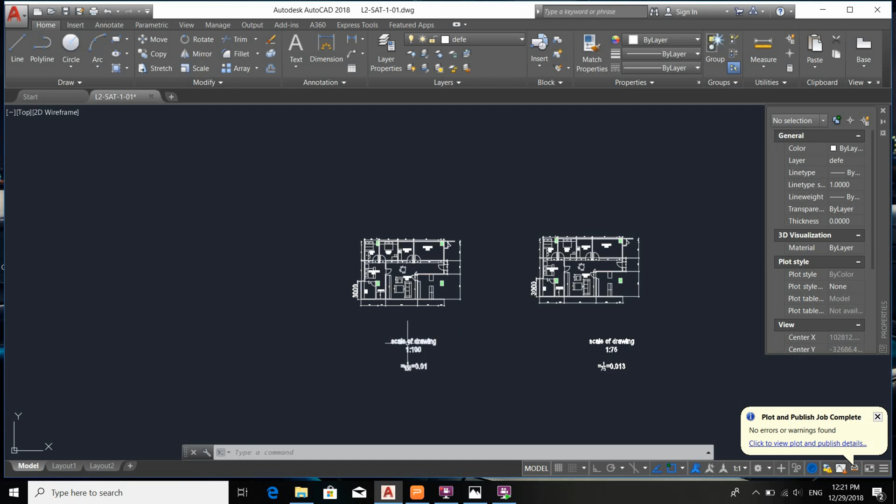Hi everyone, today we are going to learn how to print out drawings in the scale of 1 to 100, 1 to 75 and others.

To start off, we have to understand that this piece of construction drawings here is drawn up to scale, meaning that the sofa, the coffee tables, they are all drawn up to the dimensions in real life. So, now we want to print this construction drawings on an A4 size paper with a specific printer at the scale of 1 to 100.

To draw an A4 size paper, we know that an A4 size paper is 297 millimeters length and 210 millimeters width. 297 by 210. So now we have our A4 size paper constructed here in the scale of 1 to 1. This is an actual scale.

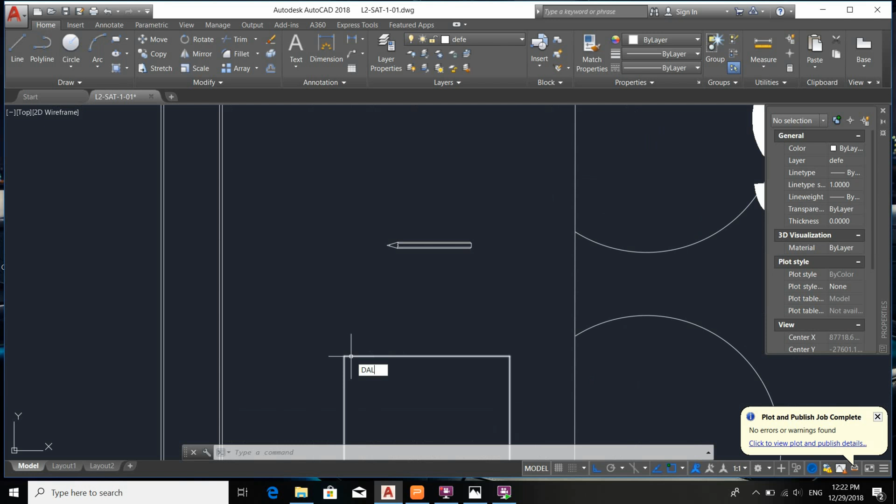You see, if you measure this, it is going to be 297 in actual scale. If you compare it with the pencil also, you can find that it is actually appropriate to say that this A4 size paper is in the scale of 1 to 1.

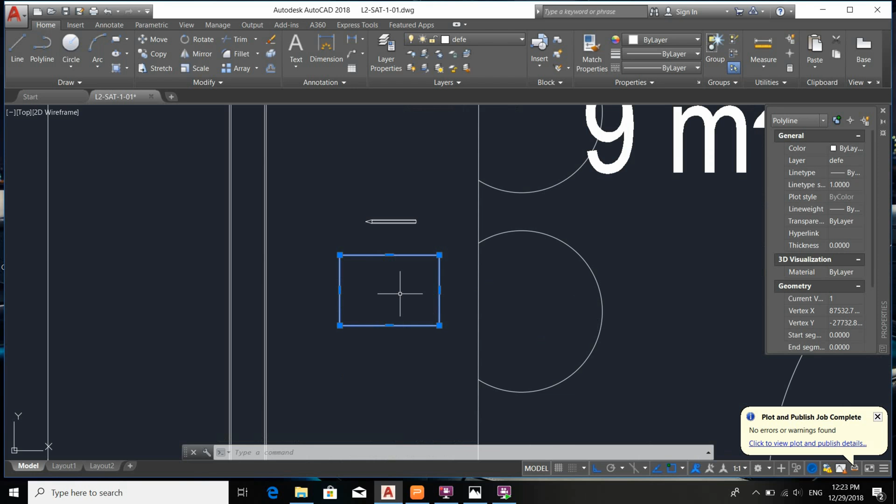Now if you want to print the entire construction drawings here into this piece of A4 size paper in a scale of 1 to 1, it is definitely not going to fit, which is why we introduced the method of scaling in 1 to 100 instead of 1 to 1. We have to decrease the scale from 1 to 1, which is not going to fit, to 1 to 100 in order that the drawing can fit into this particular sheet of paper.

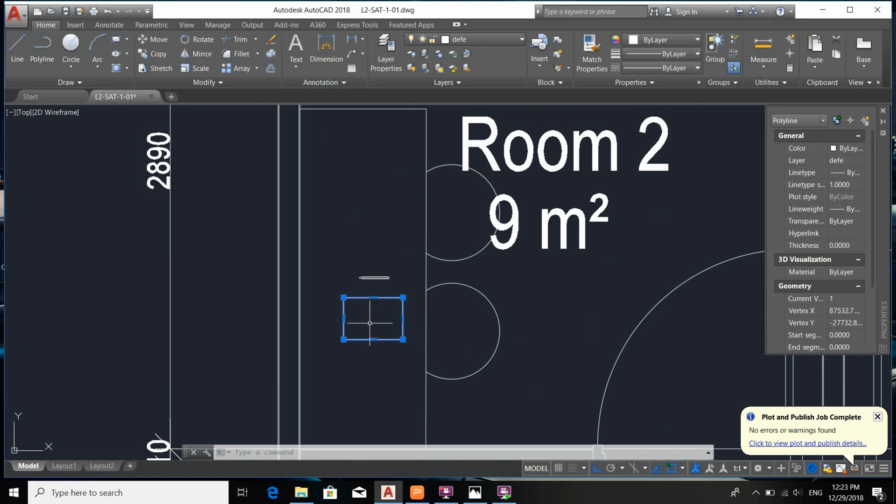So to do so, we are going to check the printing setting first. Ctrl P for print, and then select your printer type as well as your paper size and drawing orientation, and then go to Window here to select your paper. This is the boundary of your A4 size paper. You see that it is in the scale of almost 1 to 1. In this case, it's 1 to 1.042, where there is a slight deviation due to your printer settings.

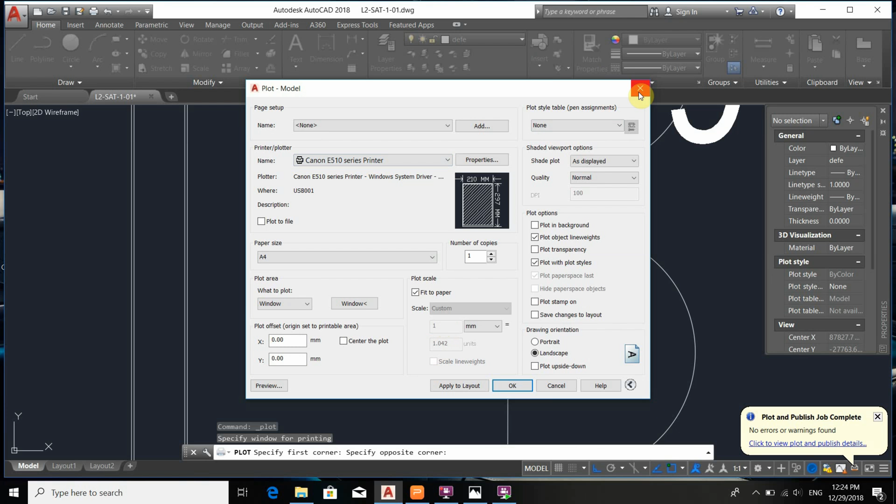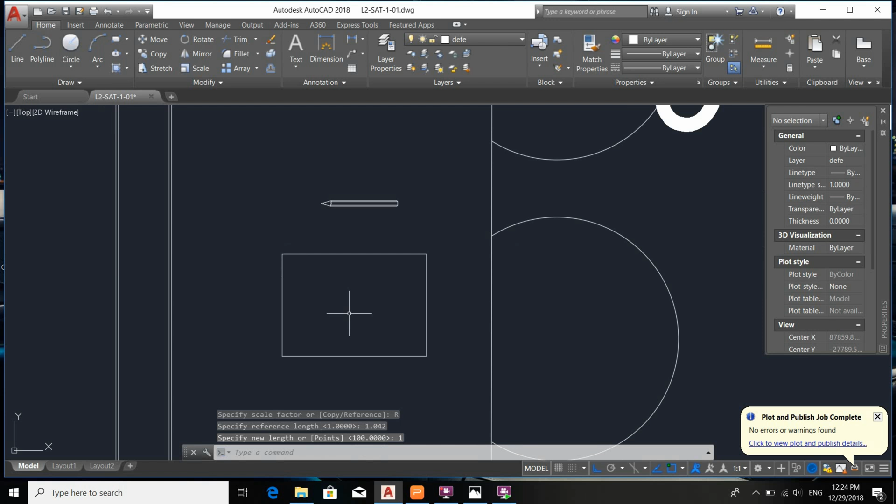So we are going to make sure this matches accurately, so we scale this paper here. We type in scale and then reference R, and then 1.042 old scale, we want to scale it into 1. And you see that now it is in the most accurate 1 to 1 scale with the settings from your specific printer. See that it is now 1 to 1, or closer to 1 to 1.

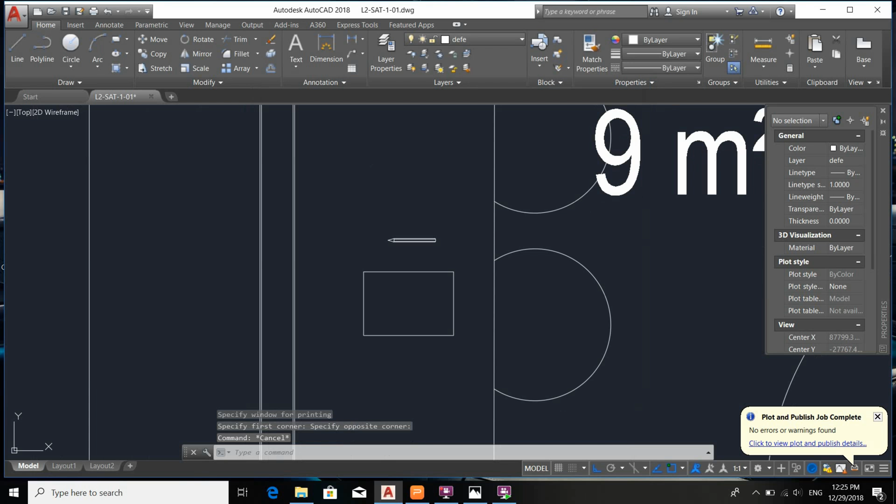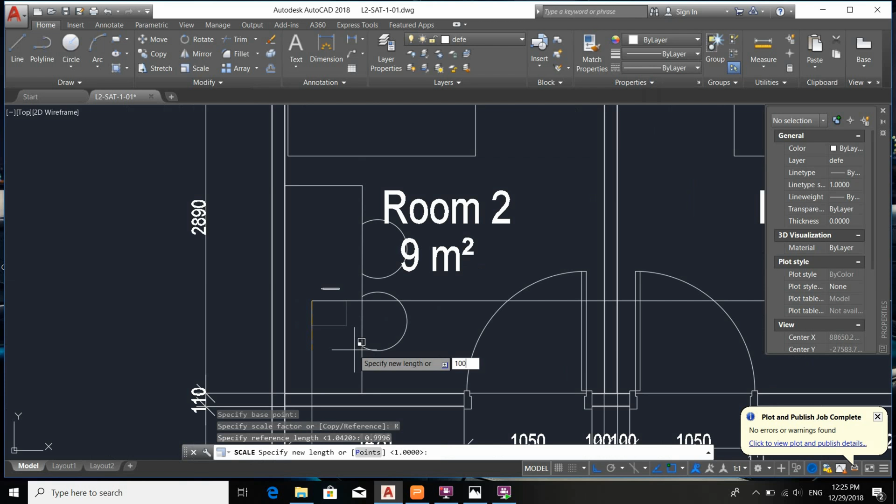So now we want to print this drawing into this A4 paper at a scale of 1 to 100. So we are going to scale this again. Okay, R from, if you remember, 0.9996 to 100. So now that your paper size has been increased 100 times, you will be able to fit your drawings entirely into our paper. This is the same A4 size paper, and now it is going to fit in nicely.

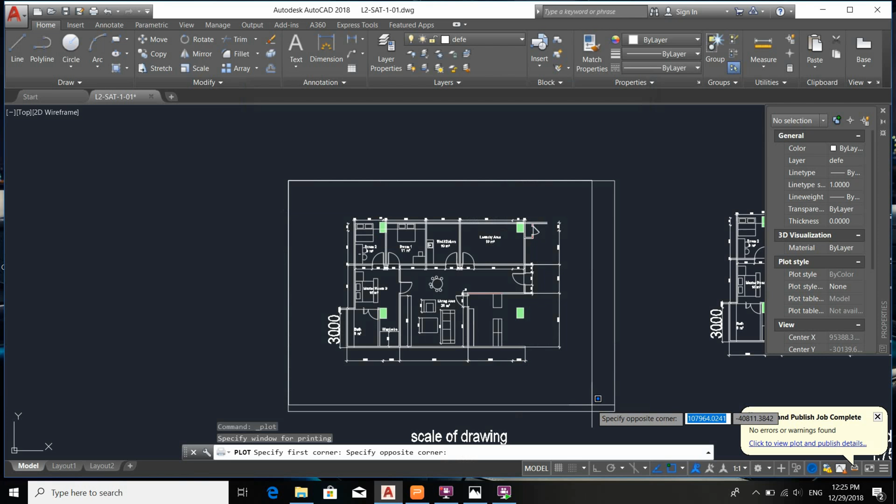So if we put in print again, window, select the edges, you'll see that it shows accurately 1 millimeter to 100 millimeters of scale.

If you now want to print the drawing in the scale of 1 to 75 instead, all we are going to do is to just copy this. This is your A4 size paper. And then we scale it instead, from 100 to 75, and then you adjust the positioning so that your object is entirely covered inside the boundary of your paper, like this. So if you were to print this, you will notice that the scale now of your printing is 1 to 75.

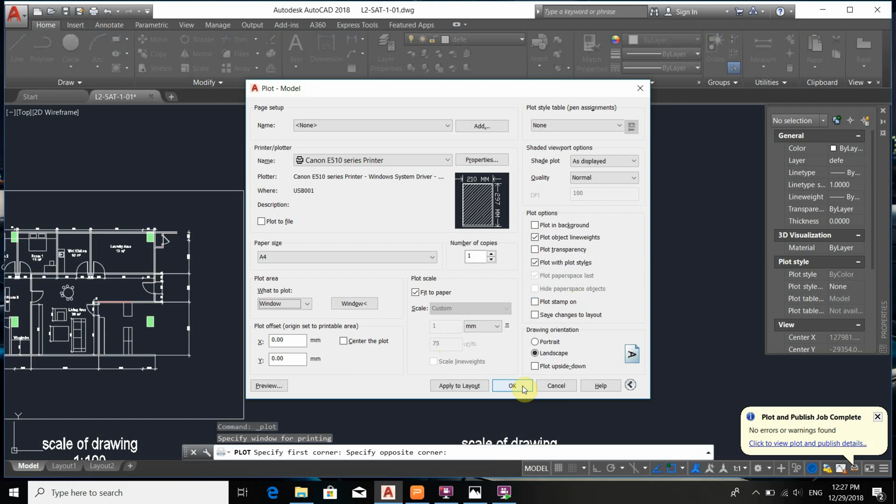To explain this, the scale of drawing of 1 to 100 is equal to 1 over 100, 0.01. The scale of drawing for this one is 1 to 75, which is 0.013. Needless to say, the scale of drawing for 1 to 75 is bigger than the scale of drawing for 1 to 100. This is 0.013, this is 0.01. This scale is bigger than this. How do we say so?

Because imagine this is the A4 paper size that we have scaled in order to have our drawing fitted inside. If you are to print out this drawing, imagine that this is going to be the boundary of your A4 paper. This is going to be your boundary, and your object that you print inside your A4 paper appears to be smaller relative to your paper size than this one.

You are going to have more empty spaces around your object, and your object appears to be smaller or more zoomed out. Whereas in the scale of drawing of 1 to 75, imagine that this is your same A4 paper. You are going to print your drawing out whereby your object size in the center appears to be bigger and more zoomed in than in this case. This one will have lesser or tighter empty spaces around, and your object certainly appears to be more zoomed in.

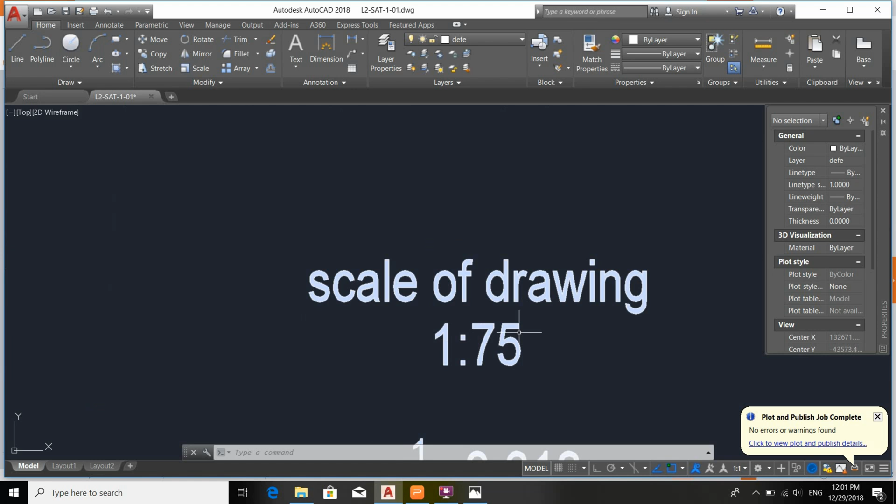To conclude, the more zoomed in your drawing is on your paper, the smaller your number will be here in the denominator. So, in other words, in the scale of 1 to 100, your object appears to be smaller relative to your paper size, more empty spaces, and more zoomed out your drawing appears. In the scale of 1 to 75, on the same A4 paper size, you are going to have a more zoomed in version, with tighter or lesser empty spaces around, and your object appears to be bigger relative to your paper boundary.

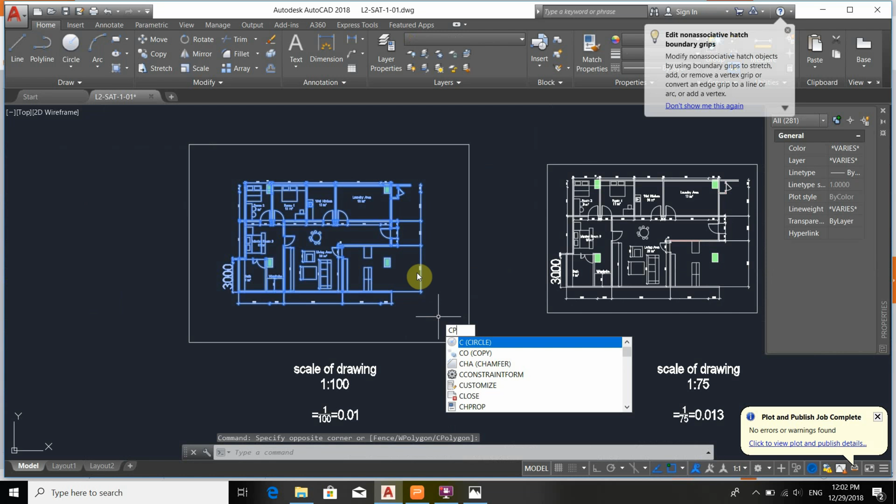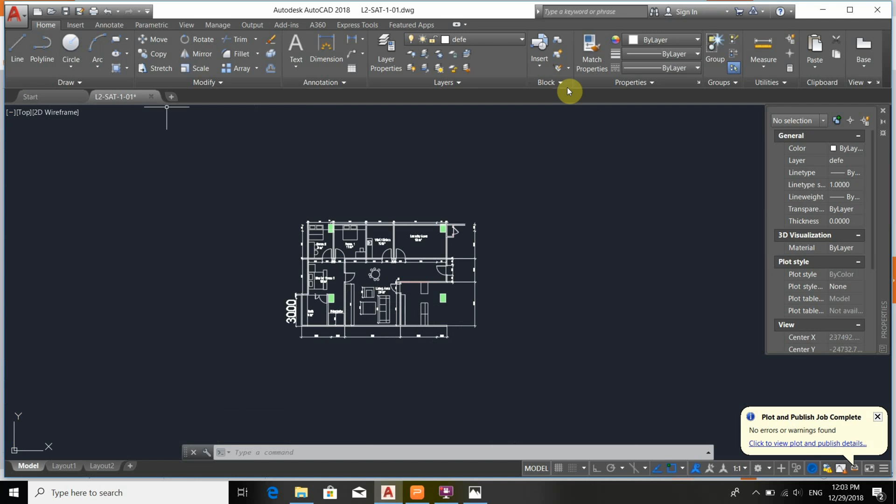If you're still struggling to understand this, let me show you a real-life example. So let's say we copy this drawing out to an empty space here to demonstrate to you. Scaling is just an art of zooming in and zooming out. You have to understand that. So now let us zoom out the drawing to something like this. Imagine that this is your paper size. Although it is not up to the right width by length scale, imagine that this is your printed paper size here at the boundary.

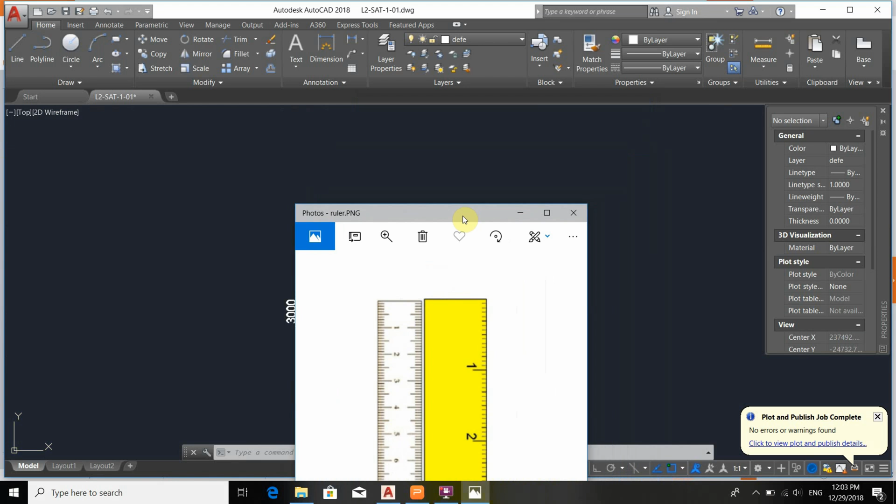So if you take out a ruler and measure your printed drawing, you can see that in this case 1 centimeter is almost equal to 3000 millimeters in actual. It is not exact, but it is just an illustration. So you have the scale of 1 centimeter to 3000 millimeters, and 1 centimeter is 10 millimeters, so you are going to have a scale of 1 to 300. In this case, if you observe, your paper size is relatively much larger compared to your object size. You have more empty spaces in between, and it is a more zoomed out version.

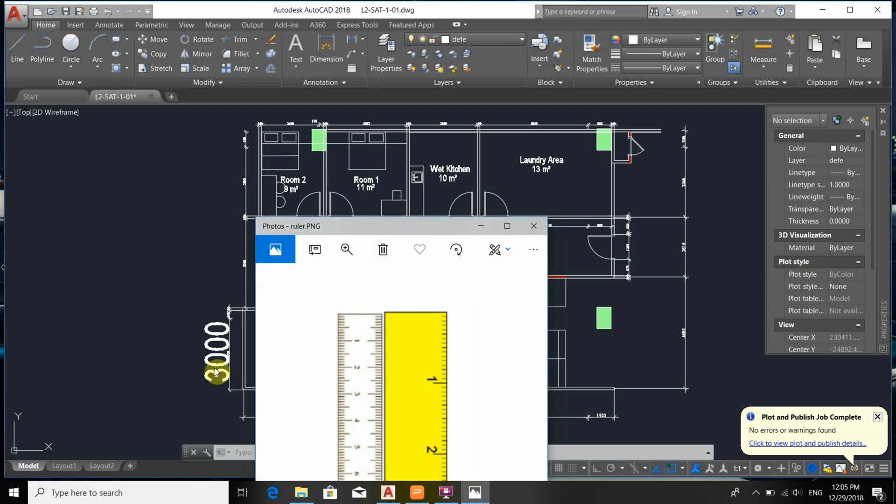If you want the more zoomed in version, now I zoomed in my drawing. This is my paper size again. We have not changed the paper size at all. So we take out the ruler and measure. Now you can see that the scale becomes bigger: around 3 centimeters of my ruler equals 3000 millimeters in actual measurement. So the scale now becomes 3 centimeters to 3000 millimeters, which is 30 millimeters to 3000 millimeters, a scale of 1 to 100. So this scale is now bigger than this scale. 1 to 100 is bigger than 1 to 300.

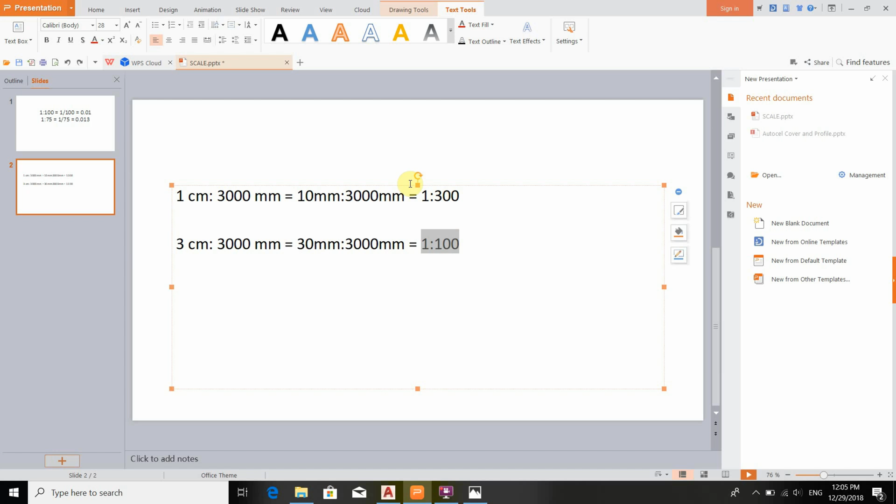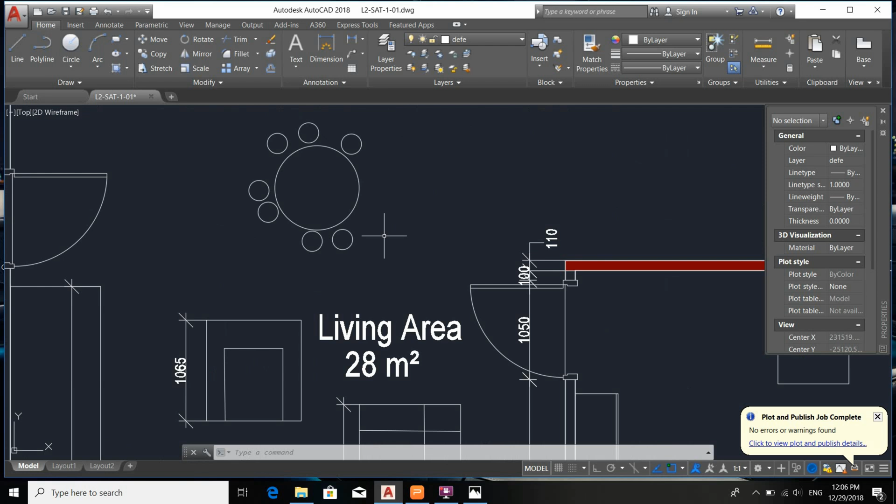And if you observe the condition here, your paper size becomes relatively smaller compared to the case just now, and your object now appears bigger in your printed drawing. This is your paper boundary. Within your paper boundary, there are lesser empty spaces compared to just now, and it is a more zoomed in version. And remember that scaling a drawing at different scales for printing is just the act of zooming in and zooming out.

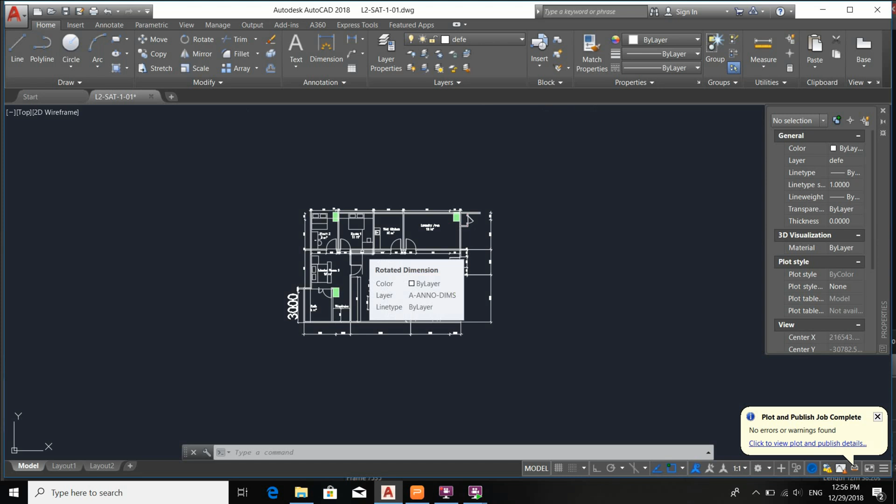In short, to print our drawings on the same A4 paper size in a scale of 1 to 300, or a smaller scale, we are going to have a smaller object relative to your paper size, and you can hardly see the text when the object is so zoomed out. Whereas if we print our drawings at 1 to 100, which is 3 times bigger the scale, the object size is relatively bigger or appears more zoomed in, and we can see more detailing in our drawings.

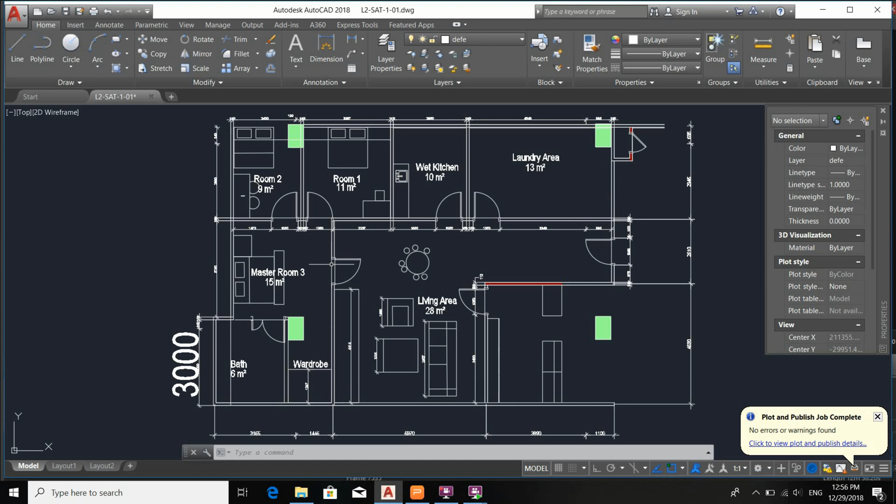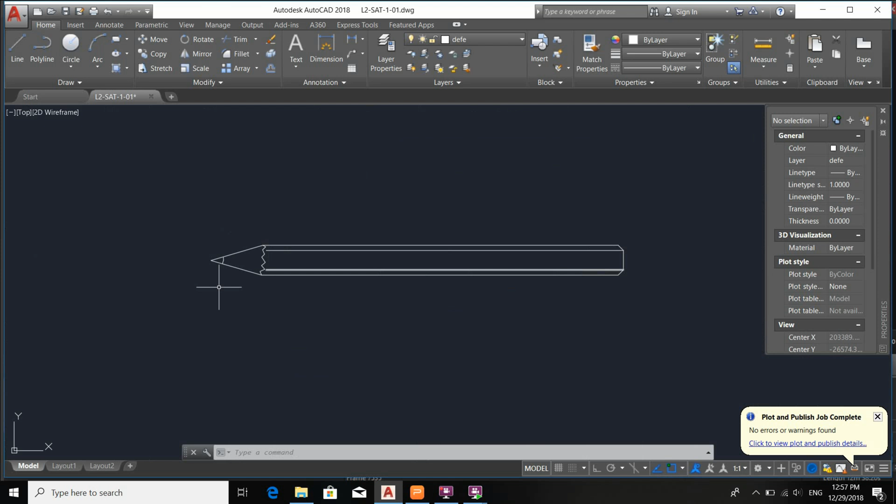At the scale of 1 to 1, we are going to have our pencil size equal to the pencil size in real life. But that is certainly going to fit fewer objects on the same sheet of paper.